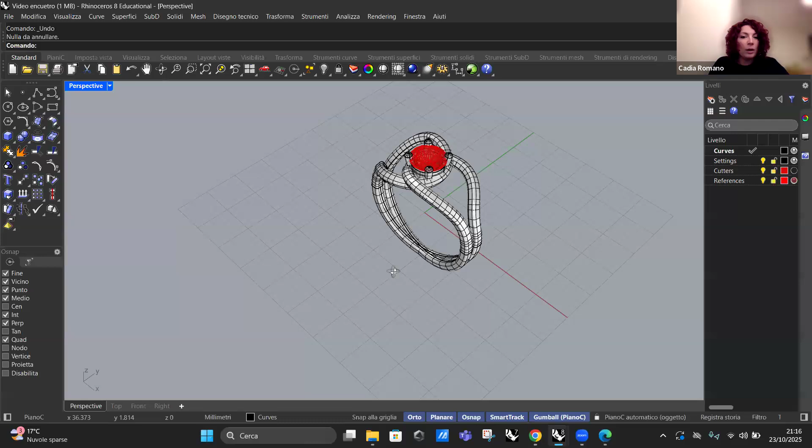Today we will start with this simple exercise. I will show you how we can start from simple lines to obtain a final project like this one. So let's start - now you can see my screen for the 3D model project.

As you can see, I have a grid, and this is my final project. So first of all, if we need to create a product like this, the first thing we need to know is the finger size of our client. The second info we need is about the gemstone, because if your jewelry has some gemstone, you need to know all its dimensions - because I need to set it in the right way on the bezel, or develop different kinds of prongs, or put together different gemstones.

For this, I need to set the space between the gemstones to protect them, and not allow them to be damaged from the metal or external action, and so on. So, as you can see, it's a simple engagement ring. I create this intersection in the middle like an endless ring, and in the middle we have a bezel with 4 different prongs and the gemstone.

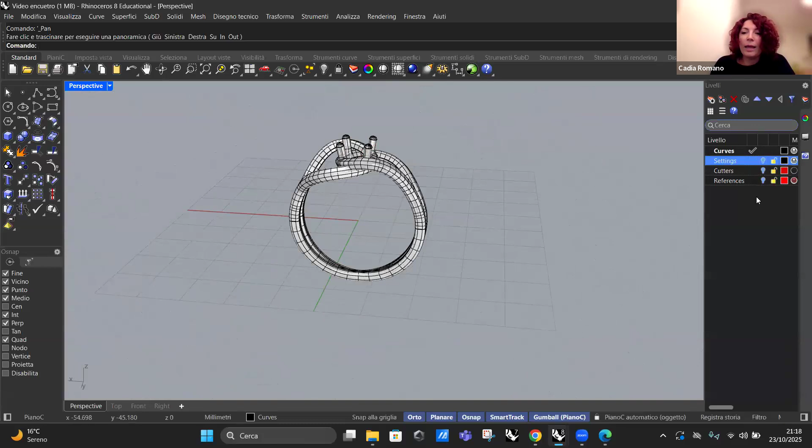I can start with the project, and first of all, we need to create the finger size.

To do this, I prefer to change the view of my 3D modeling software, because the view you have to use depends on the project you have to develop. It's like you are looking for something in a jewelry shop. If you have to see a pendant, you will see it from the top. If you are finding a ring, maybe you will see it from the front, because in this case you have to understand if the dimension is correct or not.

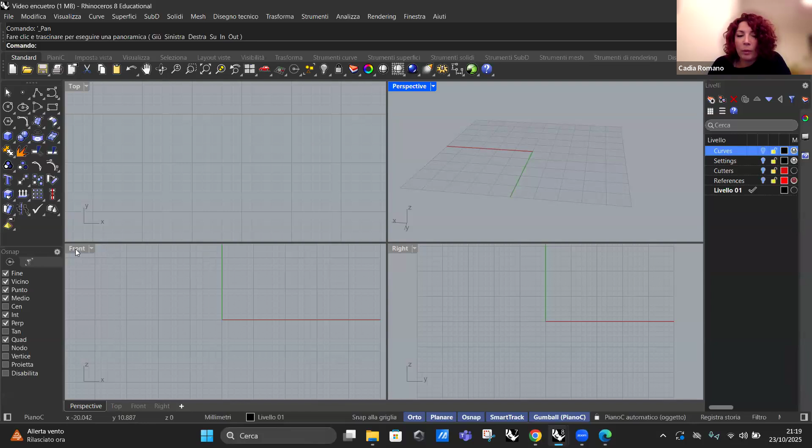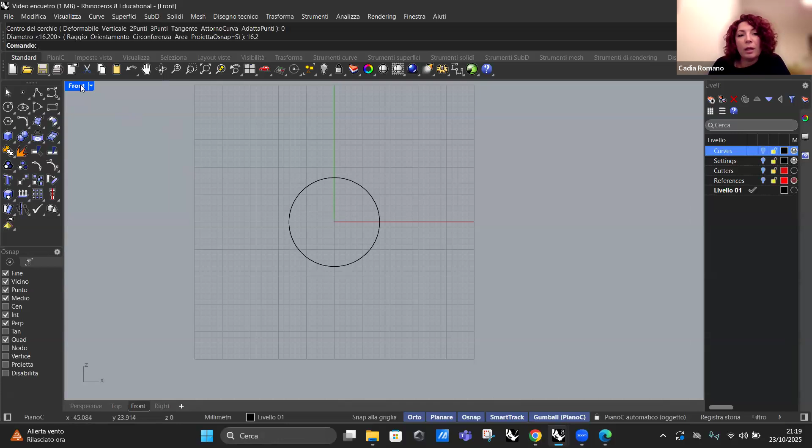So the first step will be to open the front view and create our finger size. For this step, I will use a simple circle, because you know that the ring has this shape. So I will use my shape, my size, so 16.2, more or less a medium size for a ring, and you can see that this is my size.

Then I've told you that we need to know the dimension of the gemstone, because we need to create the intersection for the endless part, and we need to understand the space that we have to work on. So if I change again to my top view, you can see the gemstone, and here it seems a simple line, but instead it's our circle. So now we can know that in the middle of the ring we have the gemstone.

Now we need to create the first arc of our project. To do this, we have here on the left part a lot of different tools. For each action, I can choose different tools.

For sure, with Rhino, I could have the same product made by different processes. The important thing is that you can decide what kind of process you want to use in Rhino. From my point of view, I try to simplify the process, because in this case I can reduce the time and obtain a lot of products in one day, for example. But this doesn't mean that my idea about the jewelry process is the best.

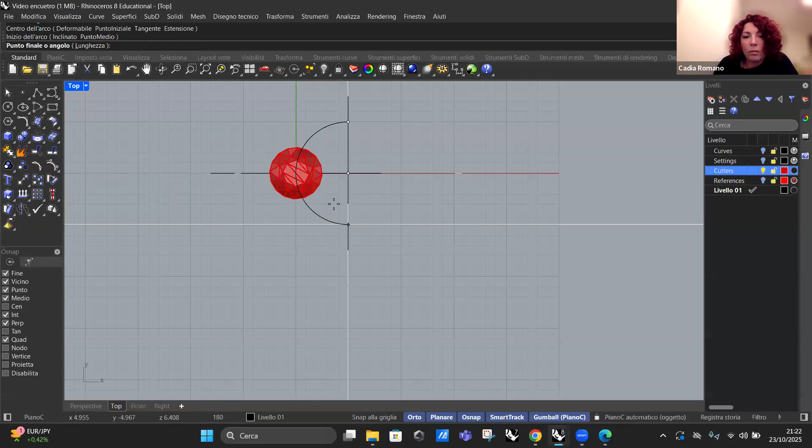Okay, I create something that is bigger than my gemstone. But as you can see now, it's completely flat. I need to recreate the same shape on my curve.

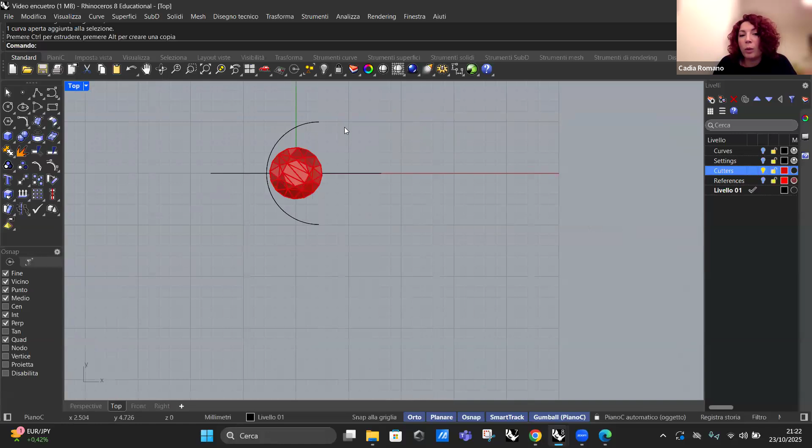First of all, we don't need only the arc, but we need to create a movement, so we can define how we can create the shank of our object. And to do this, we need to create another line, maybe something like this.

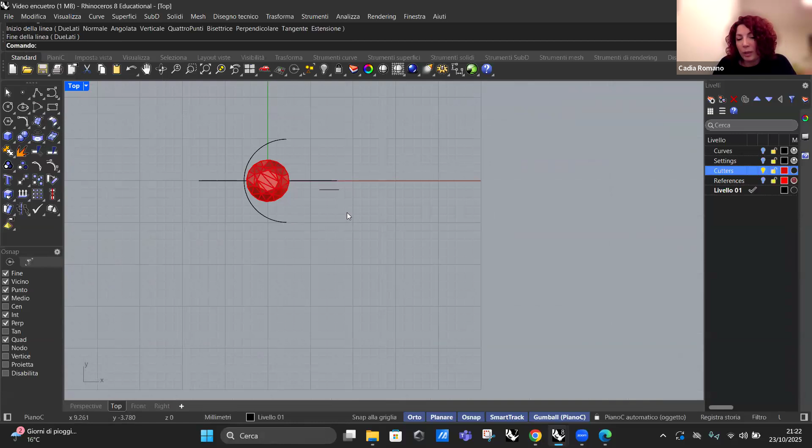It's like my geometrical reference, because in Rhino, I love to use different references to be sure that my object can respect all the dimensions and the position that I want. So I can create a copy with the mirror command. And now I need to connect these two lines.

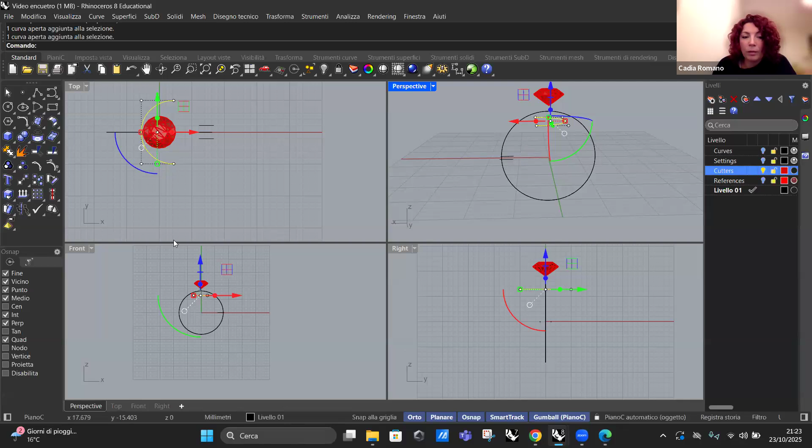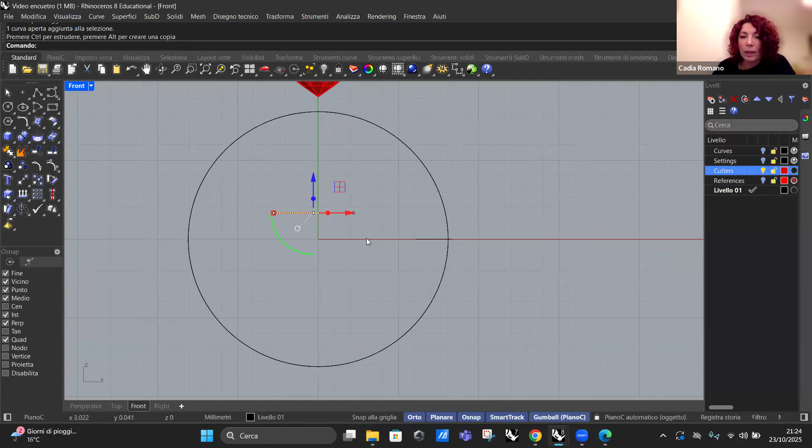We have two different layers. For now, it's important that these two parts are on the same level, so maybe I can change my view. I can go to the front view, and I can move with this helper called Gumball to the red line. In this case, the intersection of these two lines is called point zero, and the green line and the red line are called axis, like the x-axis and the y.

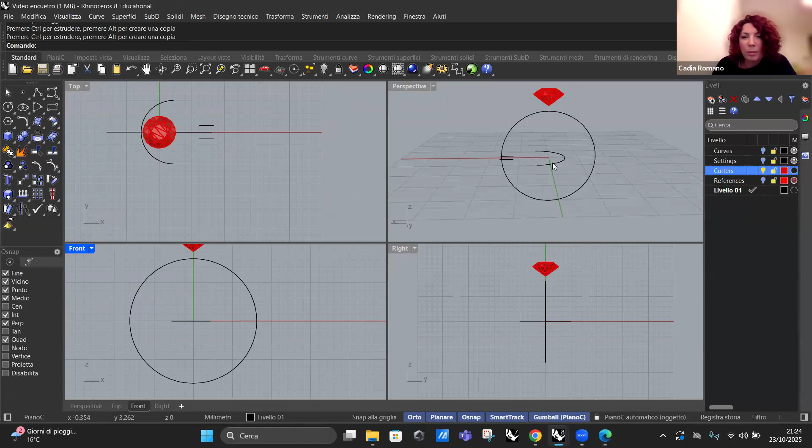So I can move more or less here. For now, the position isn't important. I need to have them on the same level, but I can be not so accurate, because then I will work again on my line.

And as I told you before, we need to create a connection between this line and the other reference that I did. In Rhino, we have a lot of options we can use, for example, fillet line, or maybe blend arc, and so on. So I can select something, and as you can see, Rhino gives me some options. If I don't like it, I can modify it in some way.

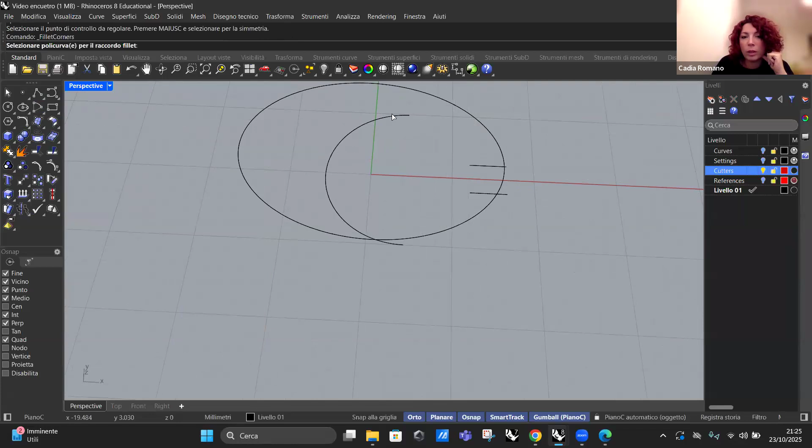I can use also another command that you can find here, the fillet corners. So I can create something like this and create... oh, sorry.

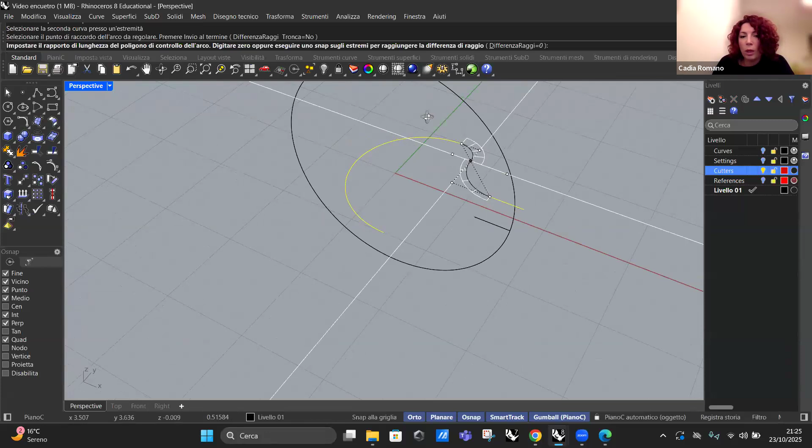Okay, as you can see, we have another kind of connection between the first line and the second line. Also in this case, you can modify as you want, and you can decide one of these two could be the best for your project.

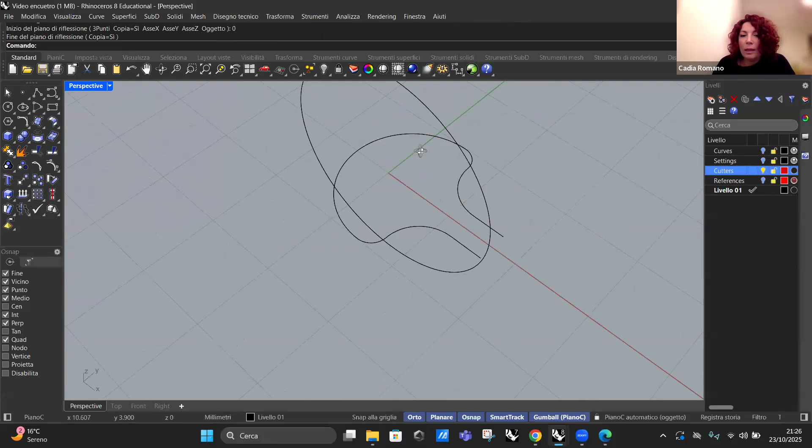When we define the connection, in this case again I need to create a copy, and we have a command called mirror, in Italian copia speculare. And more or less we have this line. If I click on my line, we have 3 different lines, so I have to select everything and click join. Now if I click, you can see that we have only one line.

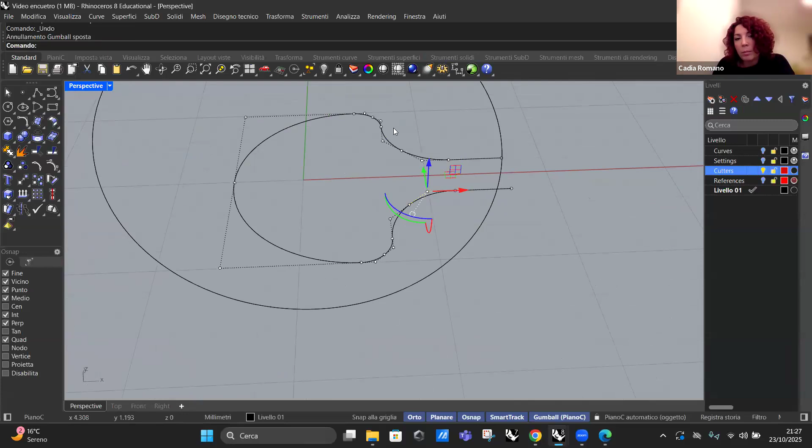Maybe if you don't like this curve, if you want to modify something, we can see that on the curve you have a lot of control points, all of these points. If I try to move, I can create another kind of line, or maybe I can decide to increase the number of control points on my line.

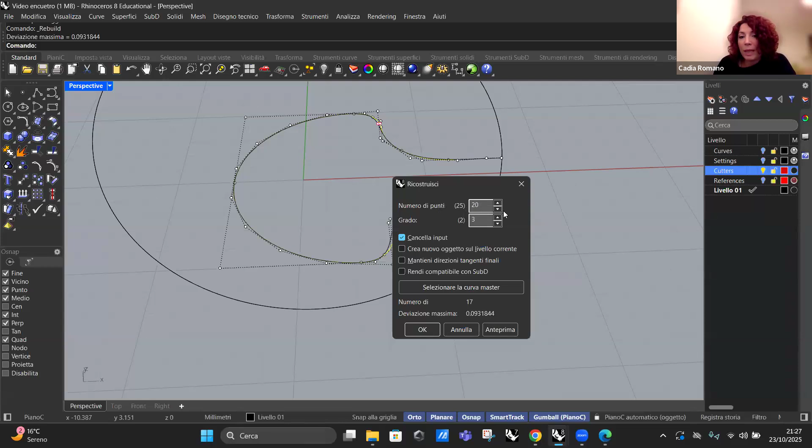To do this, we can use a command called rebuild curve. As you can see, we have this window that gives us a lot of information, because we know now that the original line has 25 points, and here you can decide if you want to increase the number or maybe decrease. In my case I want to simplify, and as you can see, when I reduce the number, I will also modify the shape of my line.

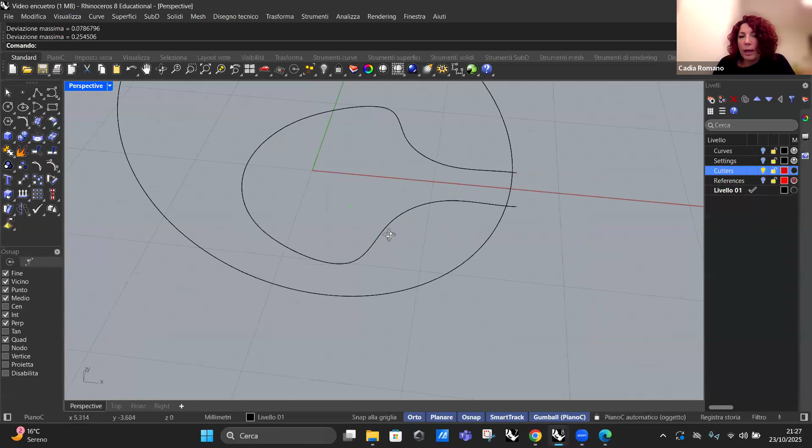Maybe 15 could be okay. I click OK, and I have something like this. Again, if I don't like something, I can click here or here, and I can reduce as I want, and I can continue until I find the perfect shape that I like.

After this, we have to recreate the same shape on these finger size. To do this, I can create an extrusion starting from my finger size. So here we have the option extrude straight, it's like a pipe. And we can recreate the same line with this command that in English is called project curve.

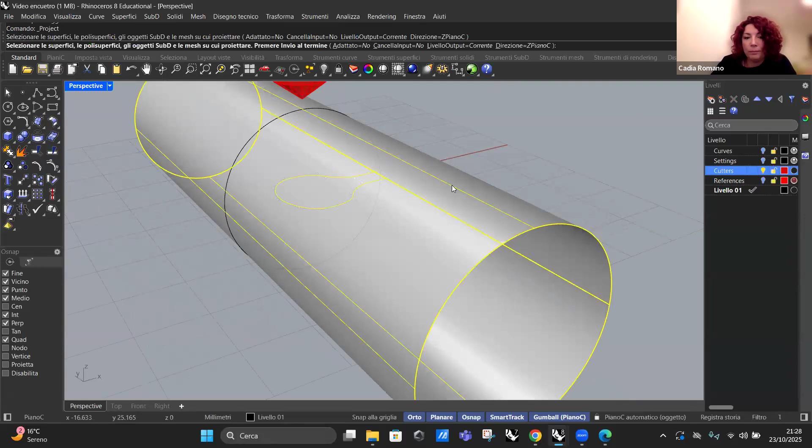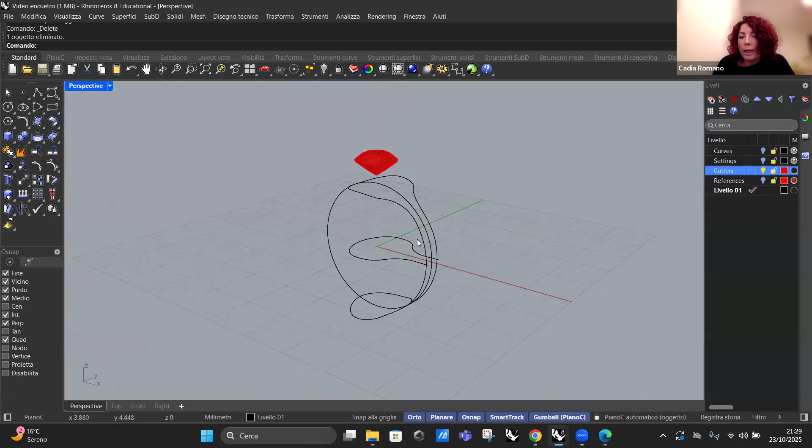As you can see now, I can delete this part because I don't need it, and now we have the first part of our ring. So now it's not important to have the part on both sides. We can cut off the part that we don't need, and we can start to work with our control points.

Because in the first model that I showed you, you can see that we have an intersection between these two shapes, but we have also 2 different planes. So I have to rotate a little bit the lines that I'm using now.

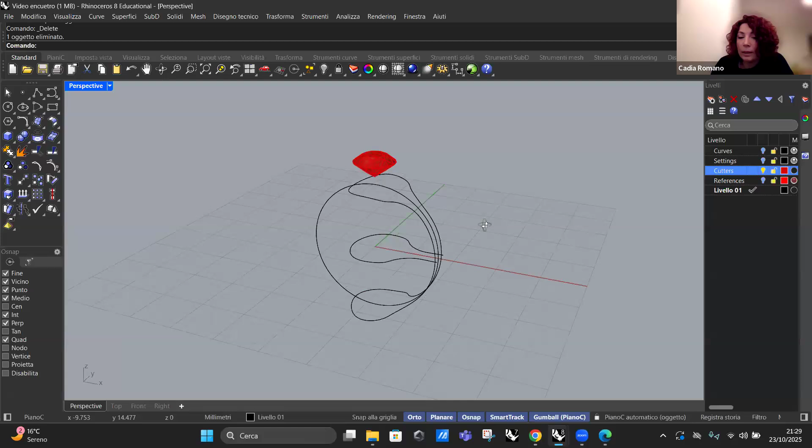First of all, I can delete, or maybe I can hide this part, because for now we don't need it. And then we can cut off this part, because we need only the part on the top and not on the bottom.

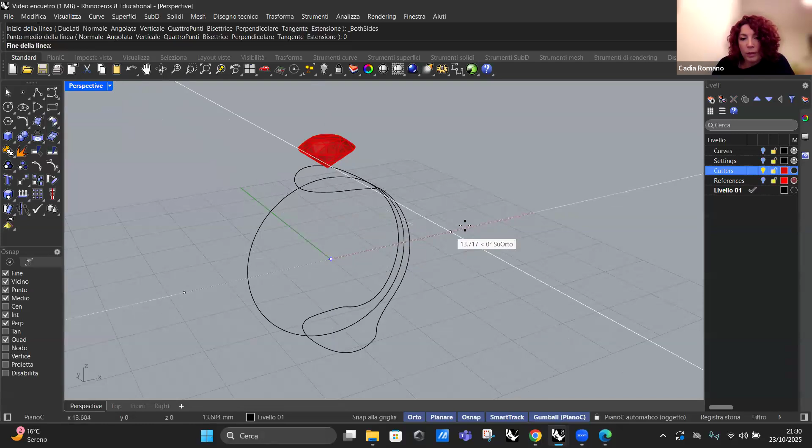To do this, maybe we can create a surface, and we can cut off the part that we don't need. So I can use line from midpoint. Our midpoint is always 0, because we are at the intersection of these 2 axes. So we have a line that you can see now.

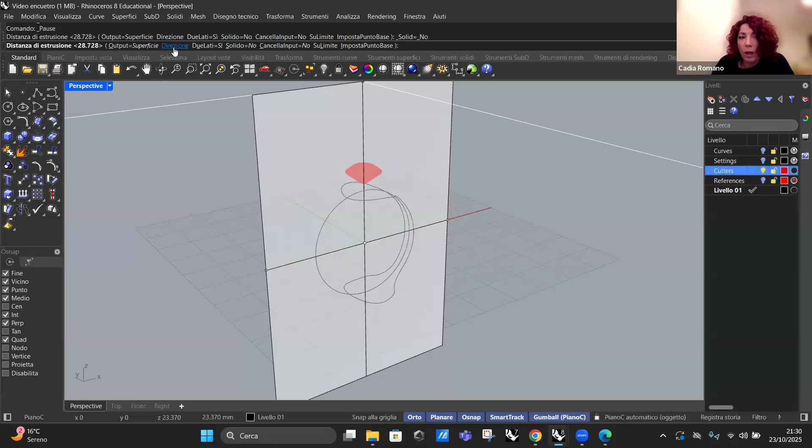As for the finger size, that is a circle, and we create the extrusion. Also in this case, we can extrude a surface. In this case, we need to decide the direction of our extrusion, and here on the top you can see the option direction. So you decide that this is the direction.

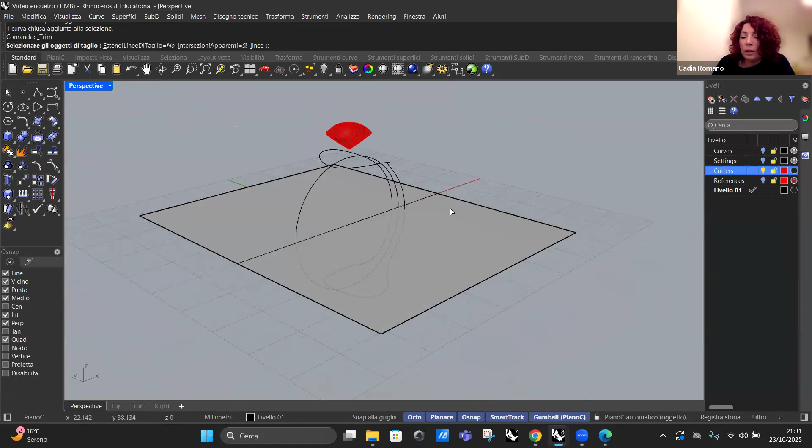Now you can see that we have an intersection between our plane and our line, and we have an option that could help us cut the part. The command is called trim. I can define the cutting object, that is the line, the plane, and now I can remove the part. I can check if everything is okay or not. Okay, perfect.

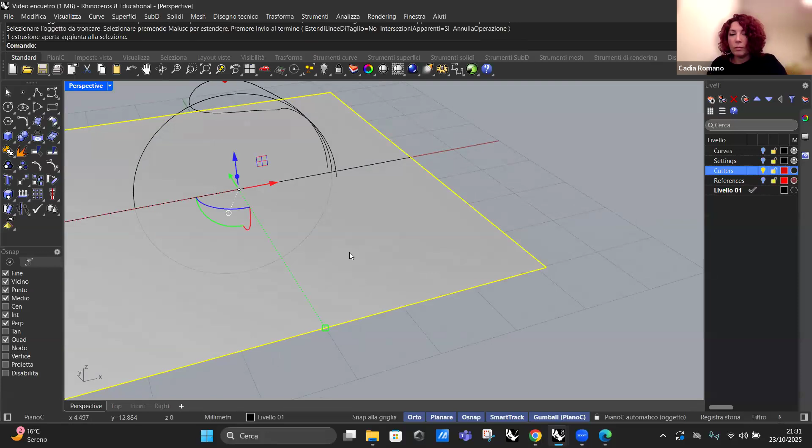So we say that finally we have the first part. Now, as you can see in the first object here, we have an intersection of these two parts that basically are the same object, but we used the mirror command and worked in different ways on the left and right control points. As you can see, we have a lot of control points. It could be more complicated to modify this structure, so we have to simplify and reduce the number of control points.

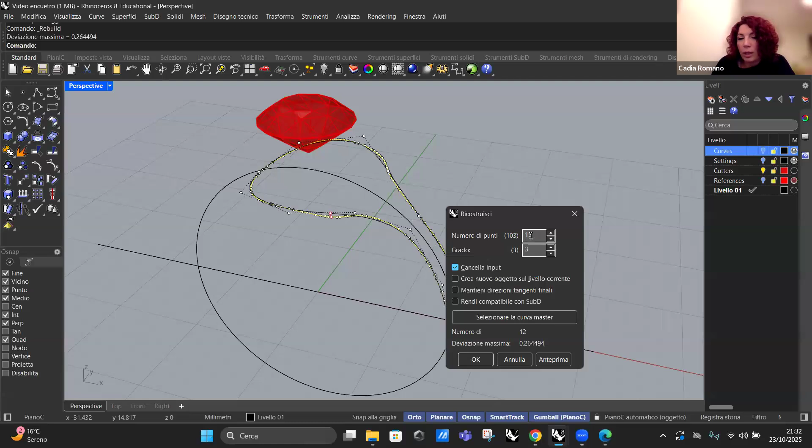In this case, I can use again the rebuild curve. As you can see, now on my line we can find 103 control points, too much. We have a suggestion that is 12, and that's okay. Now with 12 control points, you can see that we can work easily.

Maybe I can start to move something like this, for example. But before doing this, we have to create a copy of this part, and again we need to use the mirror.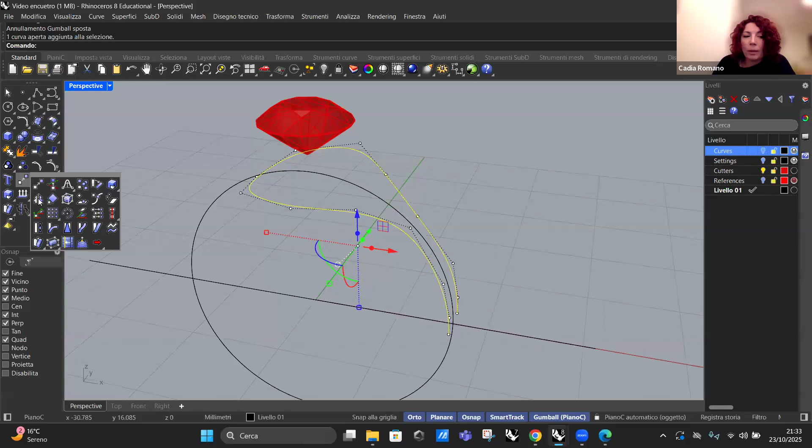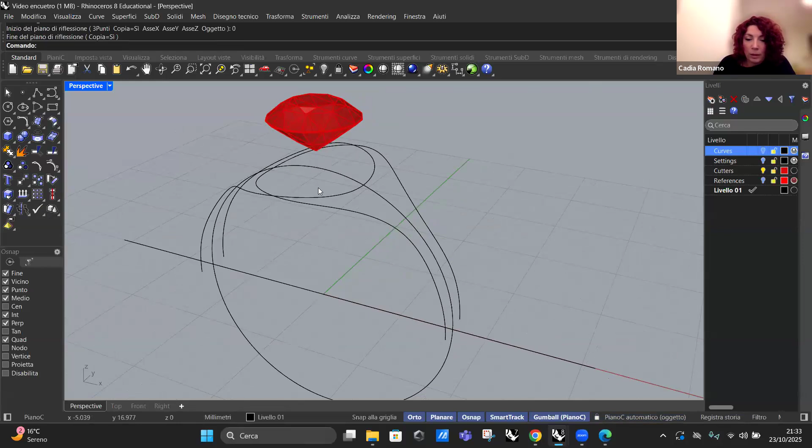At the same time, here in the bottom of our interface we can find some options. One of these is called record history, or in Italian, registra storia. In this case, it will help us modify at the same time these two parts, on the left and on the right.

So for now I want to modify this one, and I create this. As you can see, when I try to move a control point of this line, the copy will also be modified.

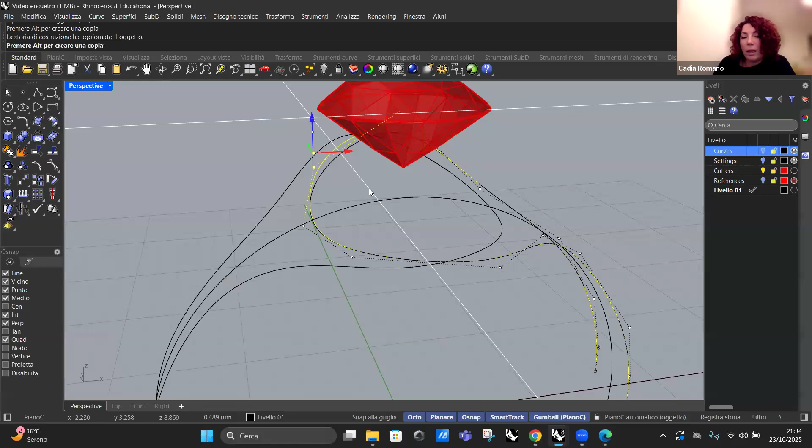I want to move this one, or maybe create something like this. We can play a lot with the control points until we reach the result that we want. So now you could say that we have a different position of my line, but it's not like the first example that I showed you.

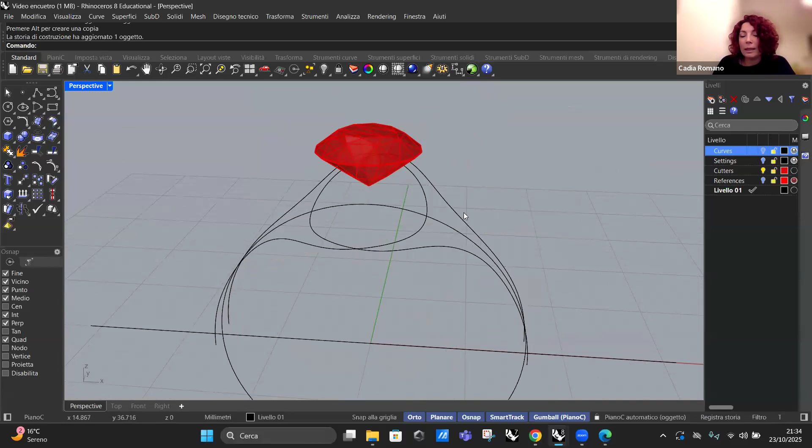It means that in this case I have to use mirror twice at the same time, because I need to create a copy, but a mirrored copy. So again, in this case, when I complete and like the line that I did, I have to use mirror again.

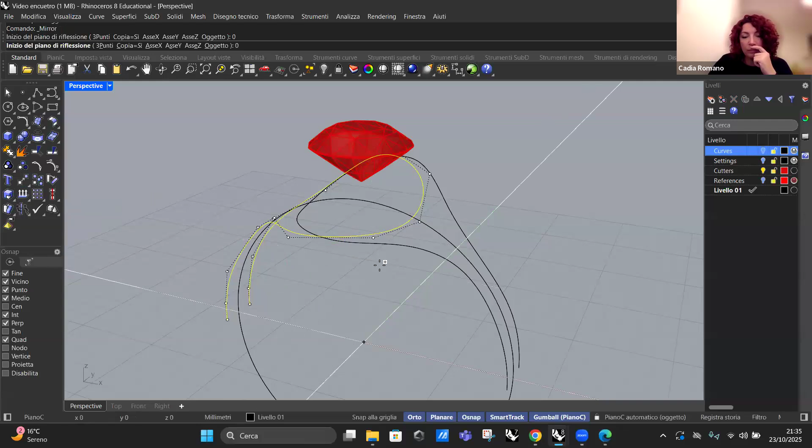Okay, maybe I can delete this one. As you can see, we start to have an intersection of these two lines, and we have the line in a different position, and it works.

Now we have the first structure, and we need to create the real object, because we started from the line, but then we need to create surfaces, solids, to give us this final volume of our object.

We can start, for example, by creating a geometrical section shape. Rhino can give us some options. Here you can find the circle, oval, square shape, rectangular shape, and different polygons that you can use for this part.

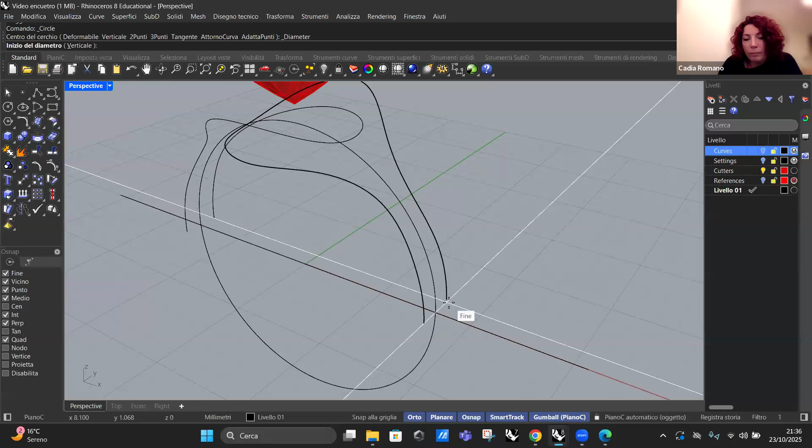Maybe we can use a circle. If I click near the command, you can see that we have a sublayer that gives us a lot of different options to make a circle. Maybe in this case we can use a circle starting from diameter. Okay, more or less we have this one.

But now I need the same circle also here, so again, mirror. Okay, now we have our line and two circles.

In this case, we can use in Rhino a command called sweep one rail, where the rail is the line and the section shape will be these two circles. We can create a surface starting from these two lines and our rail, and we can understand if we like it or not.

Also in this case, I prefer to click on record history. Why? Because if I want to modify something, I can do it in real time with record history, so I don't have to come back and redo the command. After making the surface, I can move something and modify the surface directly.

So here we have the options for the surfaces, and as you can see, here we have this option with this little number that is called sweep one rail. So I select the rail, which as I told you is the line that we did before, then first section shape, second section shape, enter.

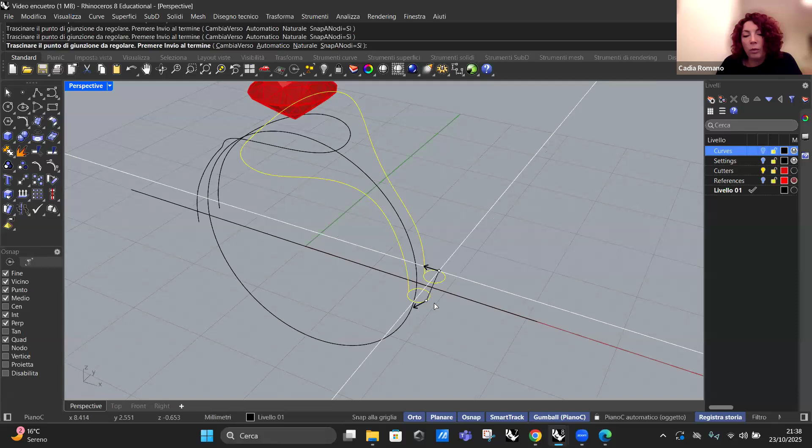Rhino will give us some options, and we try to create something like this. Okay, if I like it, I need to click OK, and everything is OK.

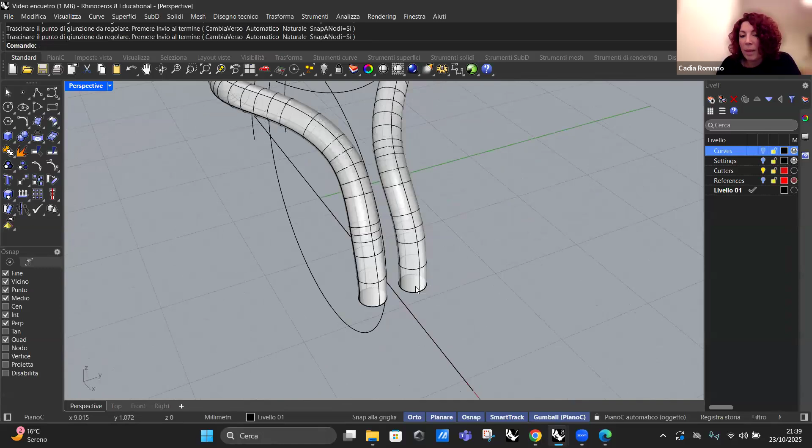If at the end of this process maybe I don't like this shape, this curve, or maybe I don't like the dimension, or maybe if I don't like the shape that I chose, I can modify it. As you can see, we can modify also the shape and the surface.

Okay, maybe I want to move, I want to create this object closer. Okay, maybe I could modify a control point, something like this.

When I work on the control point, as you can see, all my surfaces start to change. Okay, so now maybe if you want, we can increase the diameter of our circle.

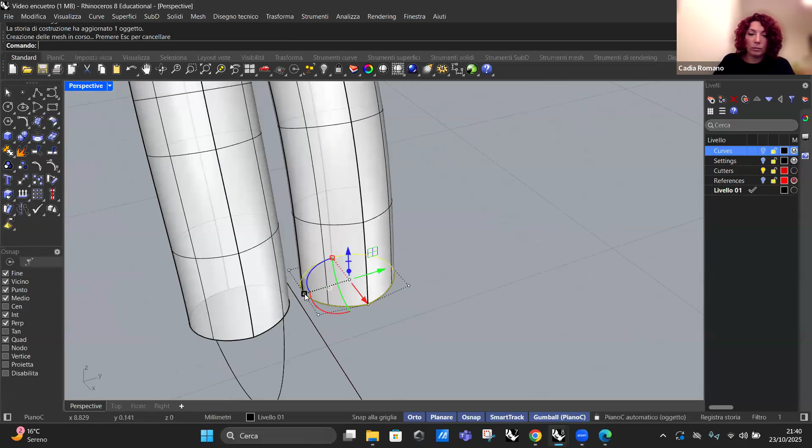Now we can say that I like this part. I can continue to create my object, and you know that we have to create the same surface on the other side. So I can select this part, and again, as you know, we can use the mirror.

As you can see, I used the mirror tool a lot, because usually if you work in a symmetrical way, you need to work on the zero. It means that all the objects you do will be the same on the left and right. So in this case, if you work on the zero, you can create only half the project, and then replicate it in a mirrored way on the other side.

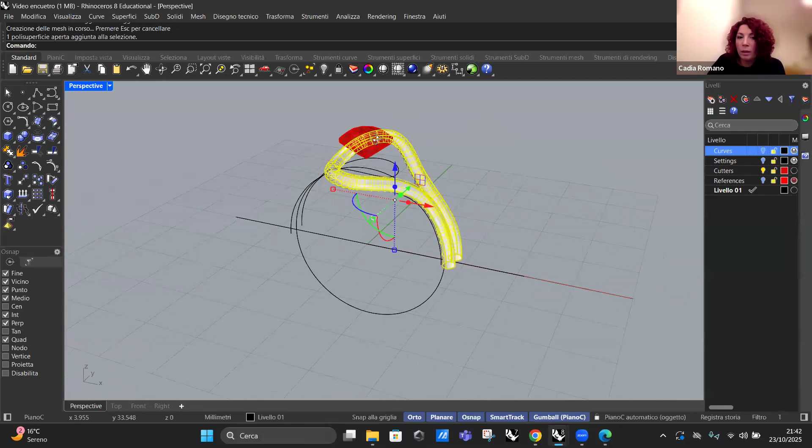In this case, you can be completely sure that your project is perfect on the left and right, and also you will reduce the time you need to complete your project, because if you have to create an entire ring, maybe you will spend 1 hour. Instead, if you have to complete half a ring, you will spend half an hour, and for this you can produce a lot of different objects.

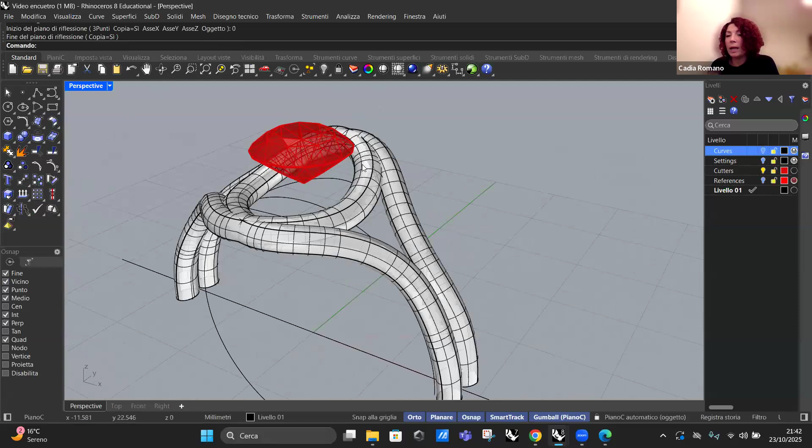So I select the surface that I want to replicate, and I use mirror again. Okay, but we had the same problem we had before, because we have the intersection in the wrong way. Again, it means I have to use mirror twice on the same piece. So again, mirror.

Okay, now I can delete this part. Okay, and we have the first part.

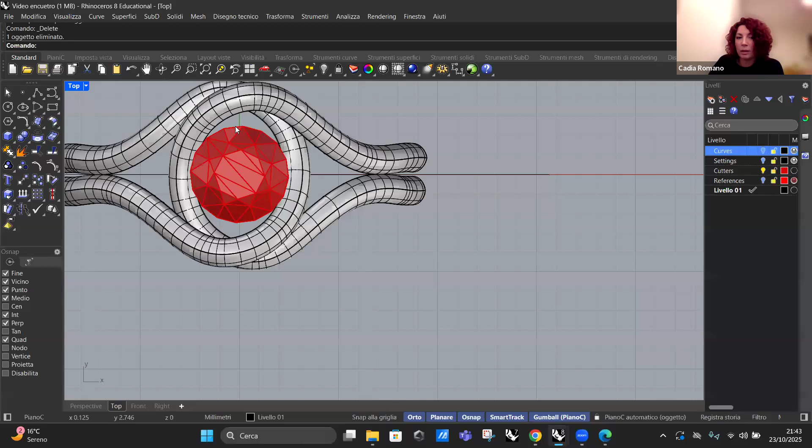For sure, if we compare with the first ring, the shape is different, because you can decide to modify the object as you want. We can decide to modify also the line we use for the sweep one rail. Maybe in our case, if we analyze this part, we have a lot of space on the top and the bottom.

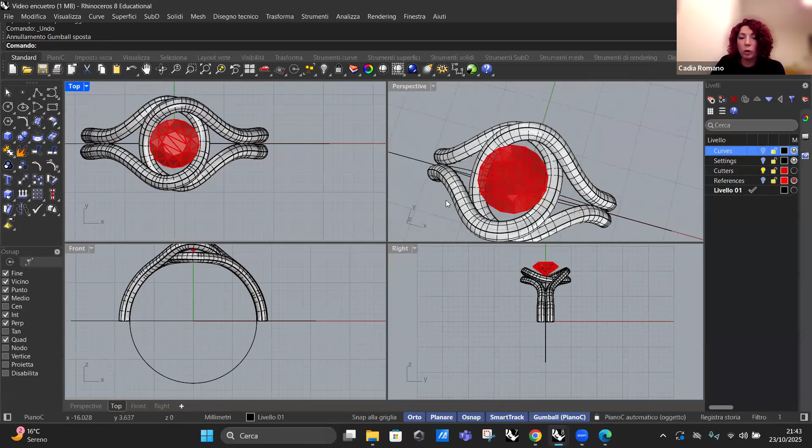If you don't like it, we can move the line, the control point of the line we use, for example, this one, and try to move the object as you want. So Rhino gives us a lot of options to express our creativity and our ideas.

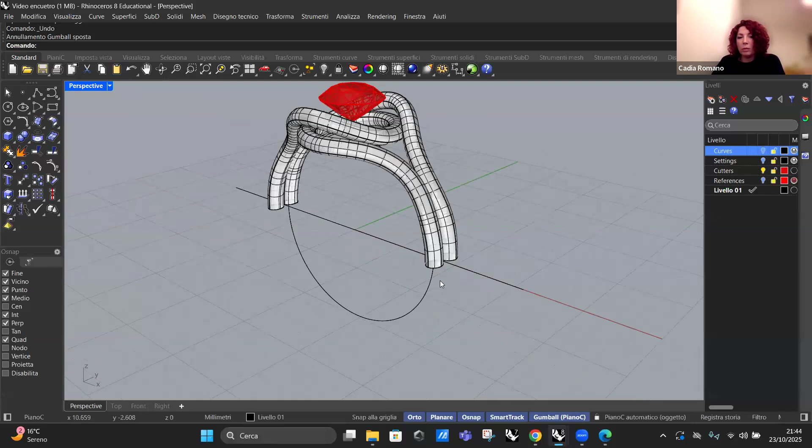So we have the first structure. Now we need to create the final part of the ring, and then we need to create our bezel with prongs. To complete the ring, we need to use the same command we used for the top. So sweep one rail, and in this case again we have to sweep one rail, where our rail will be the circle and finger size, and this one.

Oh, sorry, I completely forgot to use the same sweep. Mirror again, because I need all the rails. And sweep one rail again, first one. Okay, first part of the ring, again mirror. You can use sweep one rail again, or maybe we can use mirror, and we complete the ring.

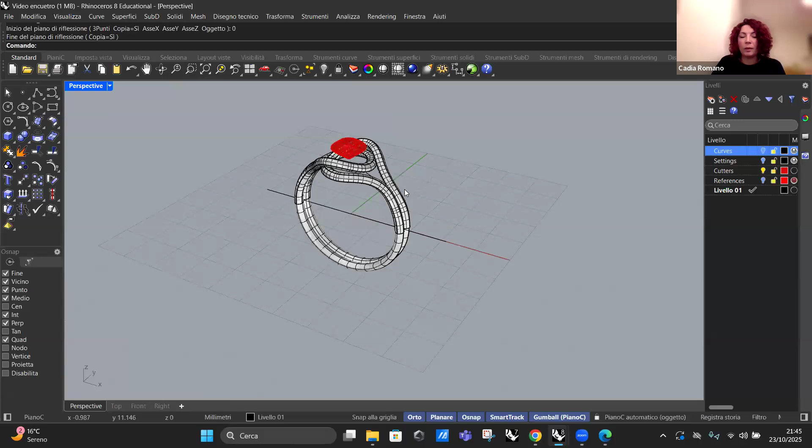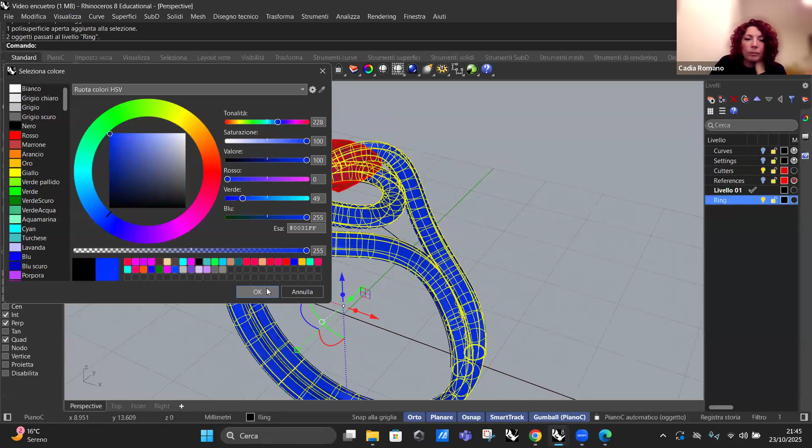Okay, and now, when we have the complete structure of the ring, we can create a new layer, and we can change the color, maybe, so you can recognize the ring easily. Okay, we have the ring.

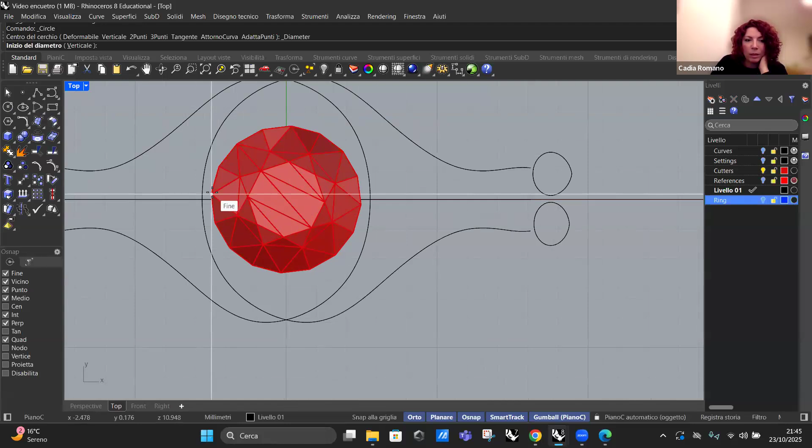Now we need to create our bezel. And on the top view, you could see the diameter of our gemstone, and also with a simple command, circle starting from diameter, we can create the first line.

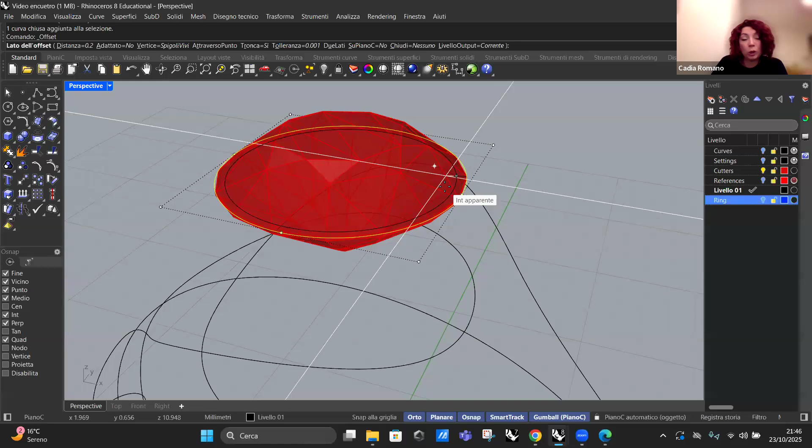Usually we need to reduce a little bit the dimension of the diameter because we need to emphasize the color, the brilliance of the gemstone from the top. We shouldn't see the metal around the gemstone. So for this, we have to reduce a little bit the diameter of the gemstone. And now you can see that the new diameter is smaller than the gemstone, and we can start to create the bezel.

In this case, we can extrude, but we can create an extrusion straight or maybe an extrusion tapered. You can decide. It's solid. Right here.

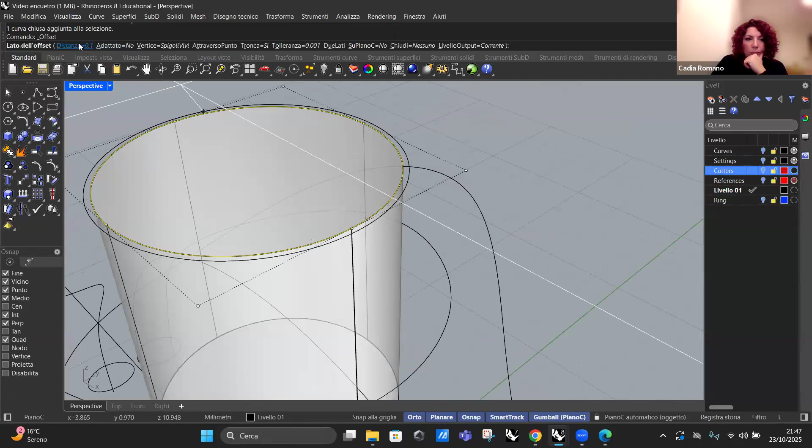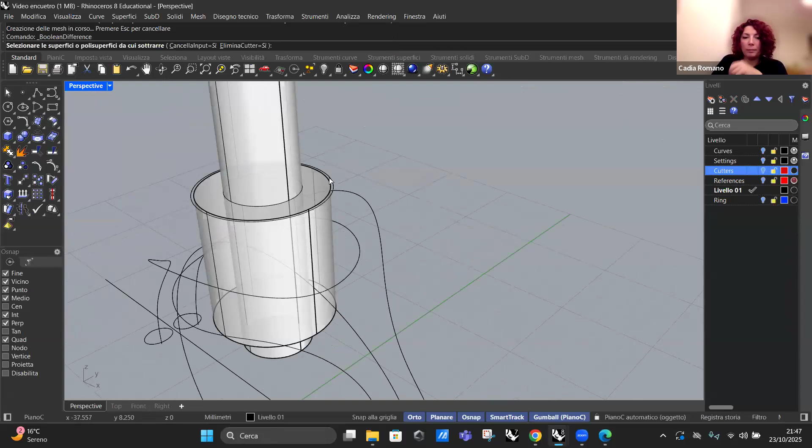I need to create the hole in the middle. Again, extrusion. I need to create the hole because I need to collect all the light that I can on my gemstone.

I need to, okay, and I can create the perfect seat for my gemstone. It means I can use another command to reduce my inner part. So yeah.

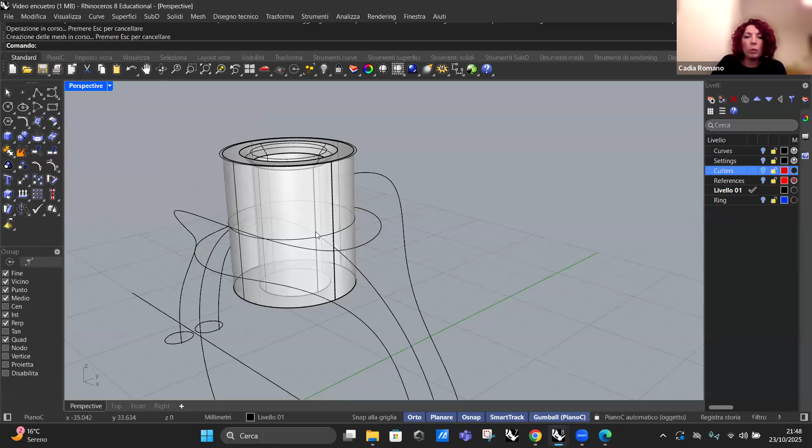Okay, now we have the first part of the bezel. As you can see, I create a structure that is bigger than my ring, and as you can see, we have the body that is in the middle of the finger size. It's not a problem because we will use the finger size like our cutting object, and we'll modify the structure.

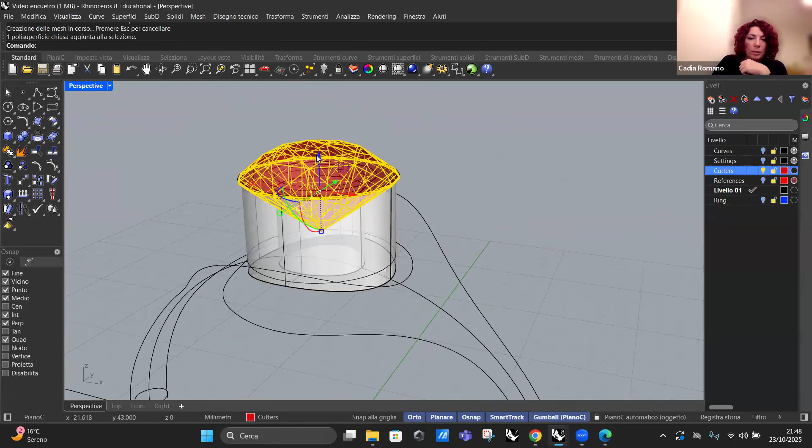Okay, and the last part is to make the perfect position for the gemstone, and now we can create a prong with a simple line. And now we have to extend because we need the prongs to arrive near the edge of the gemstone, so maybe something like this.

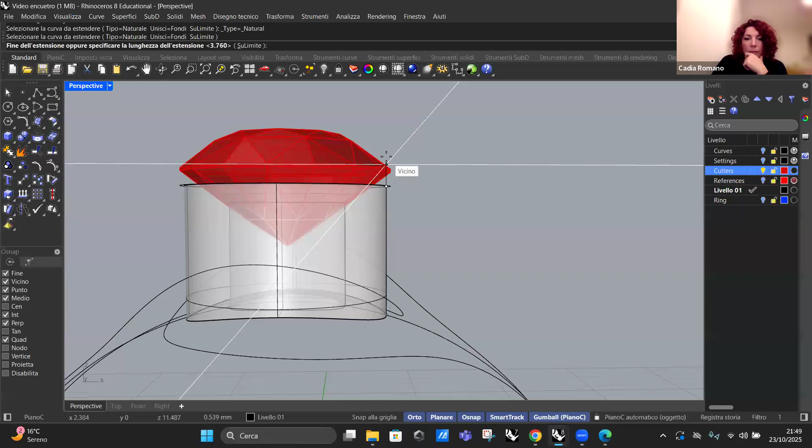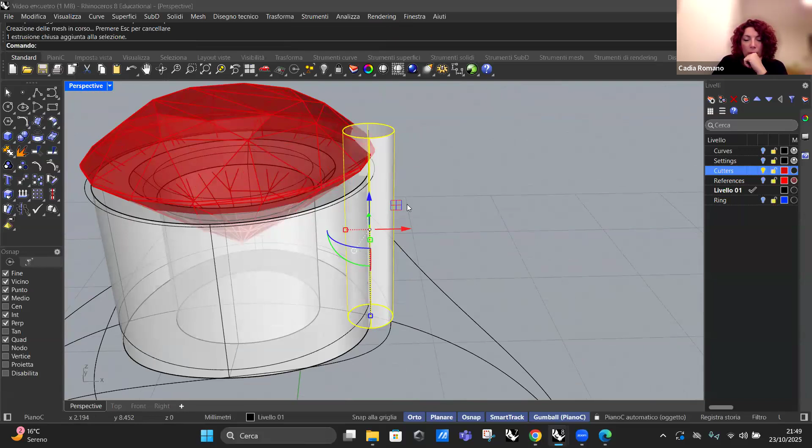And finally we can use a command called pipe. I decide that the dimension of my prongs will be 0.9, so smaller than 1 millimeter. But you have to think that we have to create 4 different prongs. It means that it will be strong enough to gem set the stone.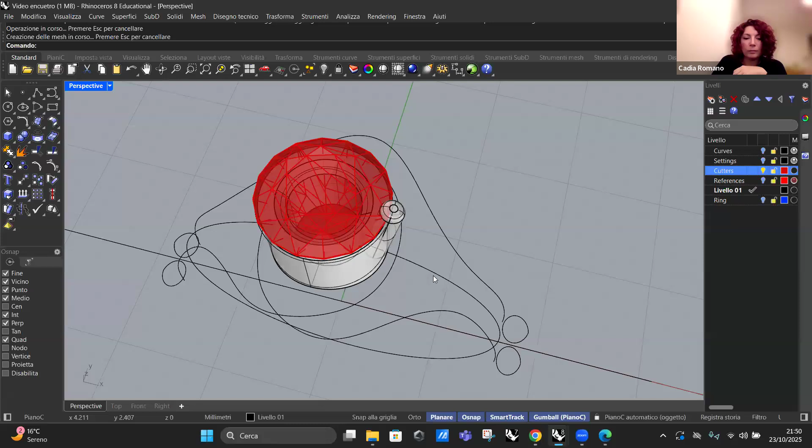Okay, perfect. Then maybe we can decide if you want to create a rounded corner or not, maybe something like this. Okay, now finally we have our prongs, the first one. And as you know, I love mirror a lot, so again I will use mirror in this case.

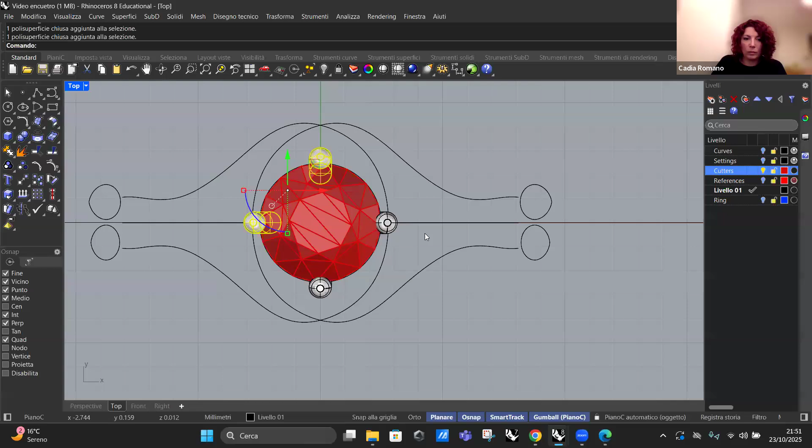Mirror, mirror, mirror, and we can complete our project, and we can start to make the rendering of our ring. So in this case, we can create copy and paste. If I want to be more accurate, I need to create a rotation of 45.

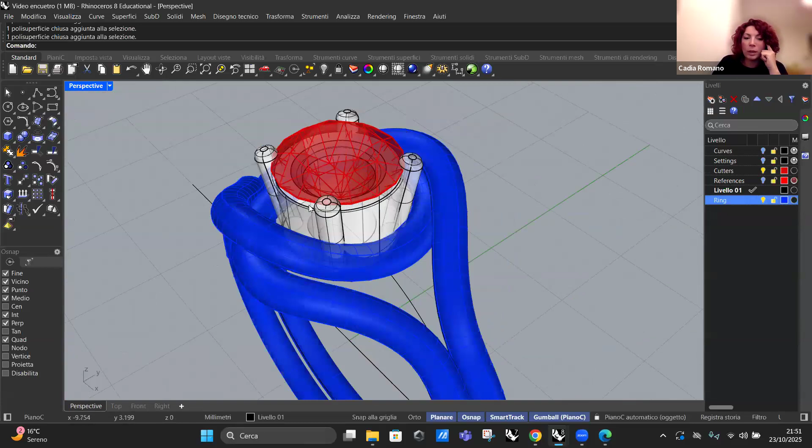We complete our project. Now, as I told you before, maybe if you don't like this space because it's too much, you can reduce starting from the control point. You can modify the structure of the bezel. You can split it into 3 different parts, because maybe we can create a gallery in the middle, because in this case the light comes through the gemstone and we get a good reflection. So we can modify the ring as you want, and continue to experiment on this model.

But now I want to show you that in Rhino we have an option about rendering, and we can find parts where you have to add material, and we can create something. For example, in this case, I want to use metal, and for the color I can choose between aluminium, brass, bronze, chrome, copper, gold, yellow gold, platinum, silver, and so on. Maybe gold.

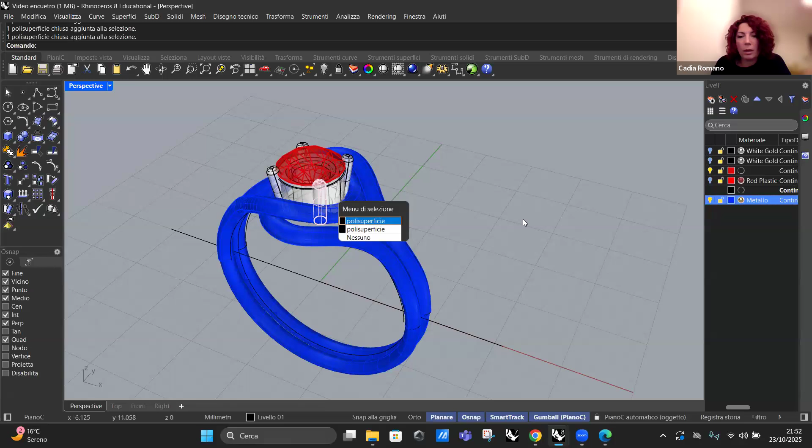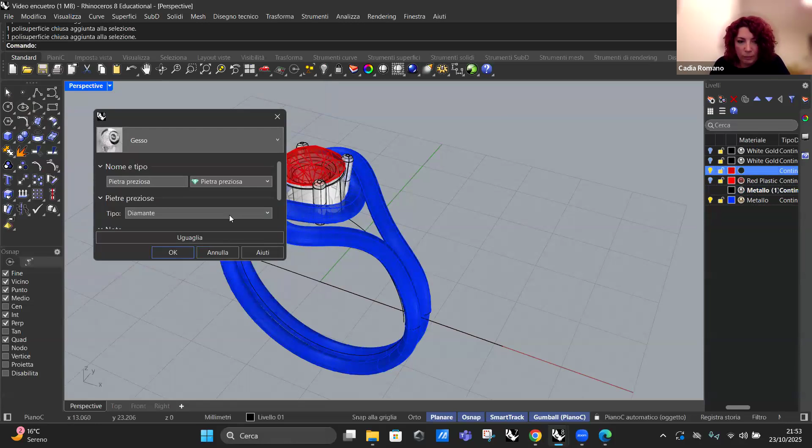And for the bezel, we can find again, I don't know, metal again. In this case, I want to use the silver one, or maybe the platinum. And for the gemstone, we have the option that is precious gemstone, and we have ruby.

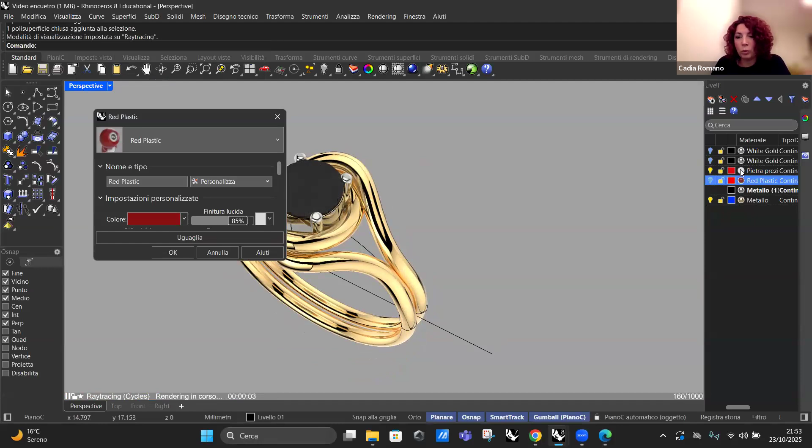So if I change the visualization, here we have ray tracing and rendering. With the ray tracing, you can see that I changed something. The gemstone in this case is too dark. I can modify the color and try to obtain a different option, but I have to set the light too, to obtain a good result on the gemstone. If I use the rendering, you can see that we have a similar option.

But instead, if we want to use the same file on a different software, in this case it's called ijewel3d.com, which you can use because it has a lot of free features for students. If you go on this website, ijewel3d.com, on the product, you can find iJewel Playground.

You will have this kind of interface. Here you can drag and drop your 3D file. In our case, we have the file that Veronica posted on our chat webinar. You can use this file and drag it here, when you open the file that Veronica gave you.

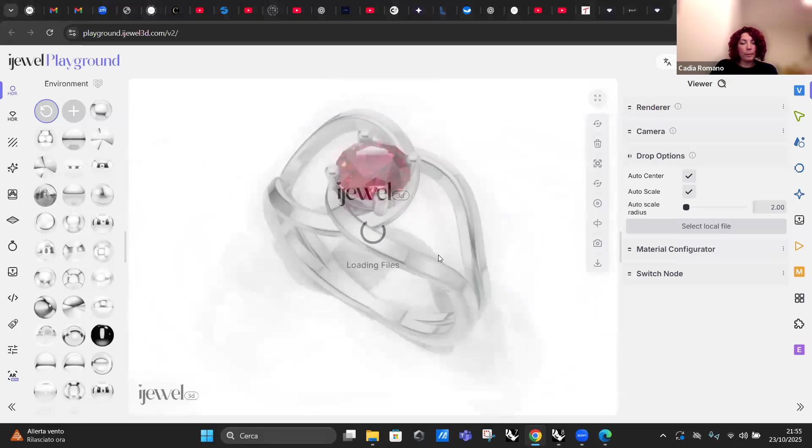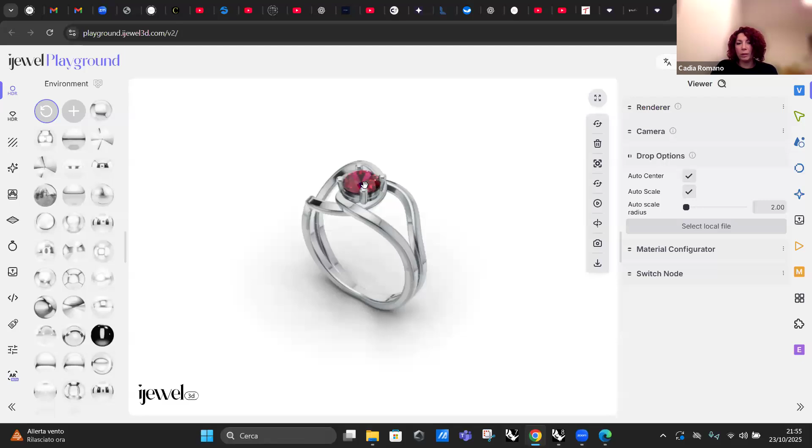Okay, you can see that this is our result. You will have the same product, white gold and ruby, but you can change the color completely if you want. You have to click on the material and you have some options. Now I have a complete license, so I have a lot of different materials and metals, but you have 5 or 6 different colors that you can use. For example, I don't know, yellow gold.

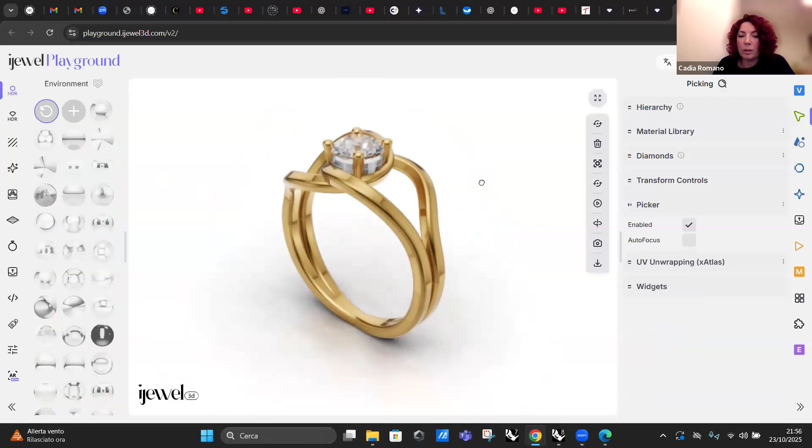I want to change the gemstone and create it with sapphire, or maybe black diamond if I want, or maybe again I can use the diamond and change the color with pink gold. Maybe I can create a bezel with white gold and the structure of the ring in pink gold, or maybe I can continue to modify and create the ring with the same color.

So in this case, with this software, you can definitely also change the environment. We can define if you want more light, or maybe if you want to use a background, maybe I can use something like this.

We also have the option to create a short animation for our social network, or maybe a simple video that you can show to your client, because in this case we could have a complete rotation. We also have the option to create a short video with different camera views, so you can show all the detail of your project.

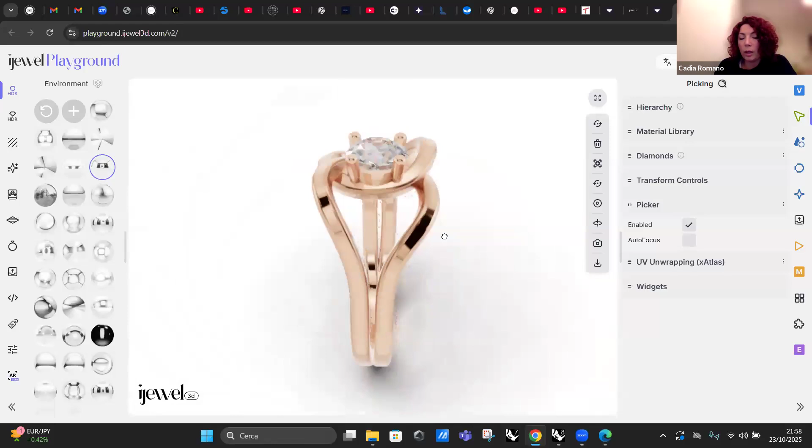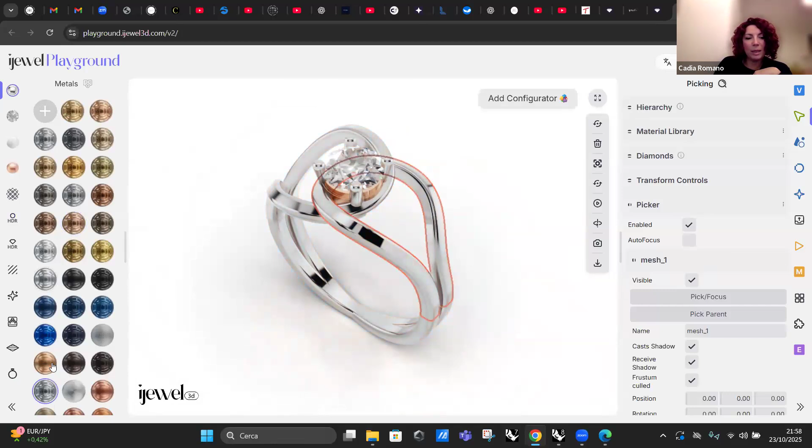You can take a screenshot of our object, as you can see, and you can understand if the project could work or not, if your idea about the chromatic contrast could work. Maybe in your idea the engagement ring was in white gold and diamond, but maybe it's too cold because if we use this one, maybe it has a different effect from the warm pink gold and diamond. So with the rendering, not only with the 3D modeling but also with the rendering, you can understand if your project could work or not, if you have to modify something, and for sure if your client is satisfied with your work or not, or if he or she wants to change something.

Now I complete my presentation. I saw that there are some questions on our chat.

Gilda is asking, any tips to get started in the world of jewelry design? To be honest, there are a lot of tips.

Maybe the first one is to start to sketch, because the sketch is the most important thing that you can use to understand the volume, the color of your design, and it's also a starting point for your client. So when you can sketch your ideas, 90% of the work is done. I prefer to sketch in a digital way, or handmade, hand drawing, as you want. The important thing is to understand the real idea, because sometimes we have an idea, but when we try to create it in 3D modeling or during the sketch, the idea could change completely. So we need to understand if there is a connection between our idea and the sketch we did, or maybe if I cannot replicate my idea, and why. So the sketch is always my starting point for everything.